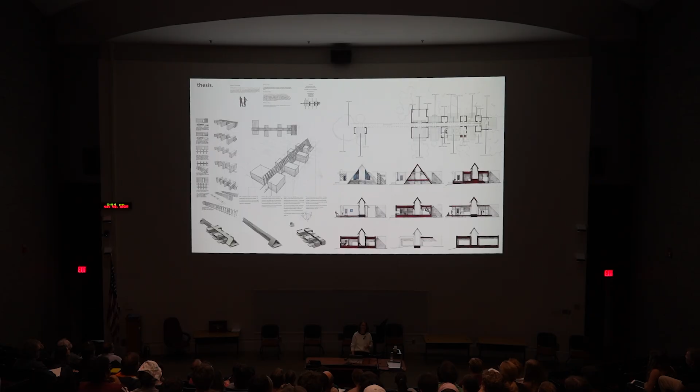After school, I went to work for a firm in Portland, Oregon. My first project, understandably, was a house. While working on it, the partner I was with brought in this book for me to reference, because it was 2007 and we still looked at architecture in books.

Inside that book was the Hill Country Jacal. For the first time, I saw my perspective reflected in architecture that was published work in the US. For me, it was a real moment of realizing that I could dream bigger than maybe I had about who I could be.

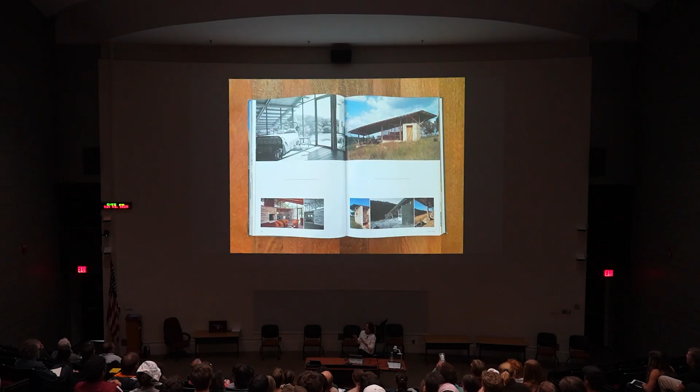Because this project was my introduction to Lake Flato, we're going to start here with your introduction to Lake Flato. This is the Hill Country Jacal, an early Lake Flato project. Jacal is a Mexican term for lean-to structures, like a shack.

Like its name implies, this is an off-the-grid weekend retreat. A thick limestone wall houses all of the messy stuff, like the outdoor shower, the composting toilet, the kitchen. Like a lot of the early Lake Flato houses, it's more porch than house. The screened living space and adjacent porch step down the hillside under a simple shed roof. It's oriented towards the prevailing summer breeze and faces a creek, while the stone wall shelters the living space from the northwestern winds.

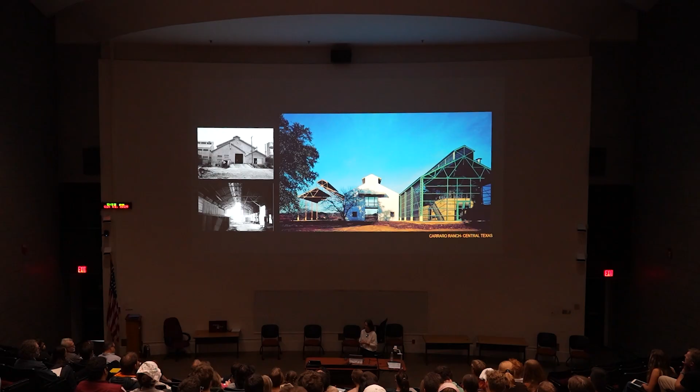Like most of the firm's early work, it's a ranch house, and these ranch houses get to follow a different set of rules than more traditional houses. Style takes a back seat, and instead it's shaped by place. These houses had to be climate responsive, so they're a collaboration with context — shaped by sun, wind, topography, and local materials. You see those threads through a lot of our early work, where we're always learning from vernacular and from the environment, leveraging the materials of place and creating buildings that are a collaboration with context.

Sustainability isn't a precious thing in these projects. It's a practical solution to meet the needs of the projects and the client.

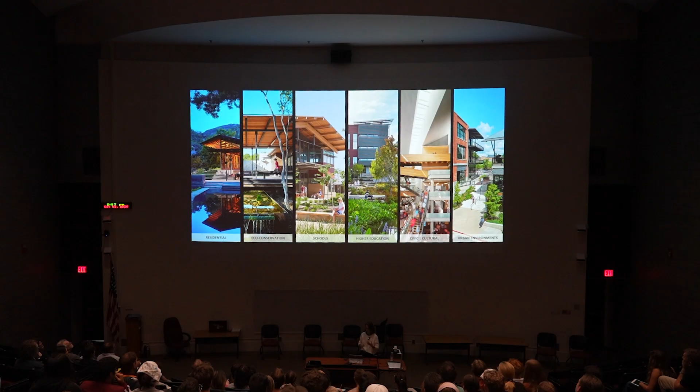From those early projects, our work's expanded to include a lot of different market sectors — residential still, but now also schools, civic and cultural, urban environments, and higher education, which has been my focus. And it's grown beyond those early Texas projects to projects all over the world. I got to work on a grocery store in the Cayman Islands, which is kind of ridiculous, but also incredible.

As our portfolio has grown, the office has grown, and you see that growth reflected every year in our Lake Flato photo when we all come together.

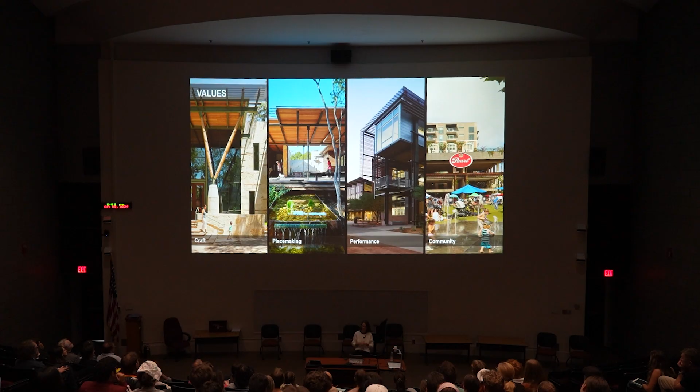All of these projects and all of those people are rooted in the shared values of craft, placemaking, performance, and community. Having these values clearly stated, and having everyone's alignment with those values, means there's some autonomy that lets us all innovate and bring value and meaning to each unique project. To be successful with each of these values takes deep collaboration with our clients, building users, our engineers and landscape architects, our contractors and consultants. And we lead those collaborations with curiosity and joy, making space to listen, because good ideas can come from anywhere.

These values and our commitment to integrative and collaborative design have proven results. We've received 13 Committee on the Environment Awards, more than any other firm. This is the project award that means the most to us as a firm because it acknowledges both great design and sustainability.

And we believe strongly you can't have one without the other. This quote represents to me why both matter: we don't love things because they're non-toxic or biodegradable, we love them because they move the head and the heart. Aesthetic attraction is not a superficial concern, it's an environmental imperative. And I'm sure most of us in this room believe good design can save the world at least a little bit, and I think this starts to represent why.

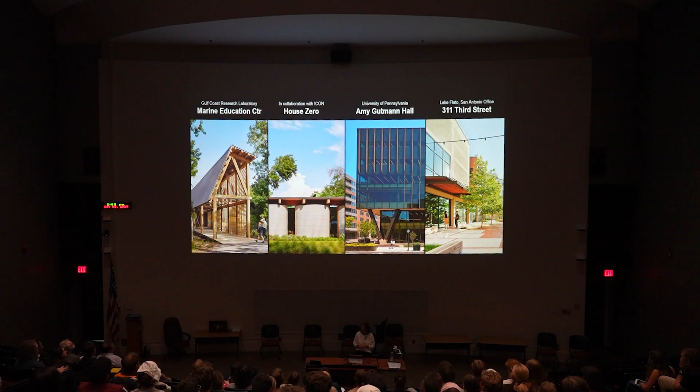So that was my introduction. With that, I'll walk through some of our newer projects. These range in scale, location, program type, and construction technology, but they're all united by those values of craft, placemaking, performance, and community. The first is the Marine Education Center in Mississippi, then a 3D printed house in Austin, Texas, and Amy Gutmann Hall, a mass timber building for the University of Pennsylvania—this one's my baby of the ones up here. And then if there's time, we'll talk about our renovation to our San Antonio office.

So starting with the Marine Education Center for the Gulf Coast Research Laboratory—I'm going to call this GCRL, because that's what we called it during the design phases, and it's a lot easier to say.

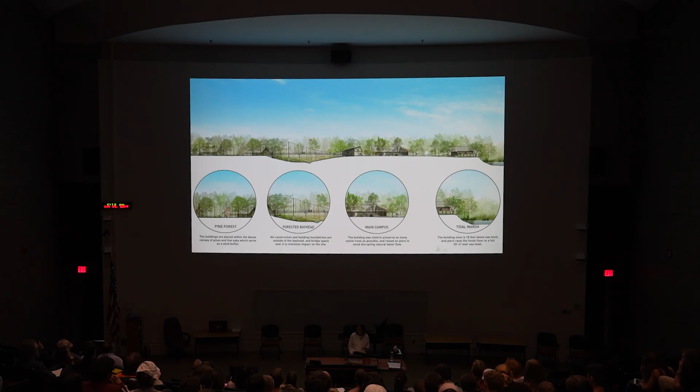The main campus, where the buildings are sited to preserve the native trees and are on piers to avoid disturbing the natural water flow. And then finally, the tidal marsh, where the buildings are elevated with a finished floor of more than 20 feet above sea level.

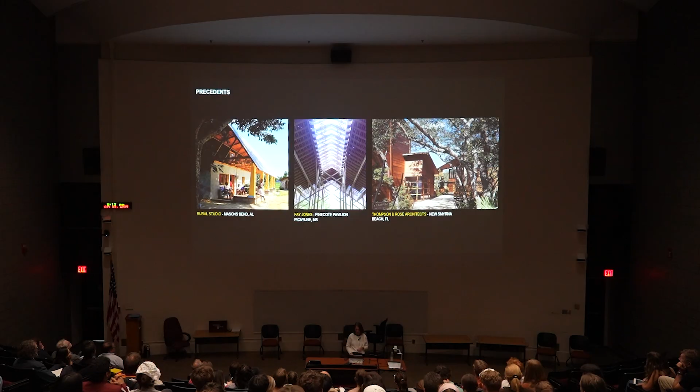While the team was learning about the site, they were also learning about the local vernacular. You can see all of these projects have really steep pitched roofs. It rains more than 65 inches a year here, so it dumps, and the roofs had to manage that. The team explored more modern interpretations of vernacular and learned from those and how they were aging, and those informed how they thought about the architecture.

This is where the entry sequence begins with this covered walkway. The building form is informed by the vertical pine forest, and like most of our projects, you move through the landscape before you enter a conditioned building.

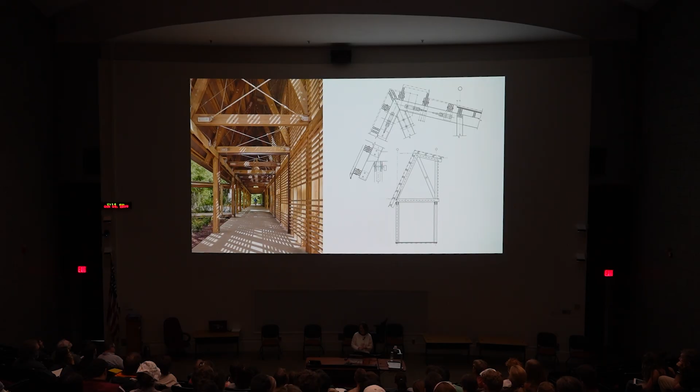There were a lot of lessons from Katrina for this client. One was that the structures needed to be repairable and that material needed to be readily available. So all of the structure is designed using dimensional lumber you can get from the hardware store, nothing bigger than a 2x12. It's also the southern yellow pine that's the same as the forest.

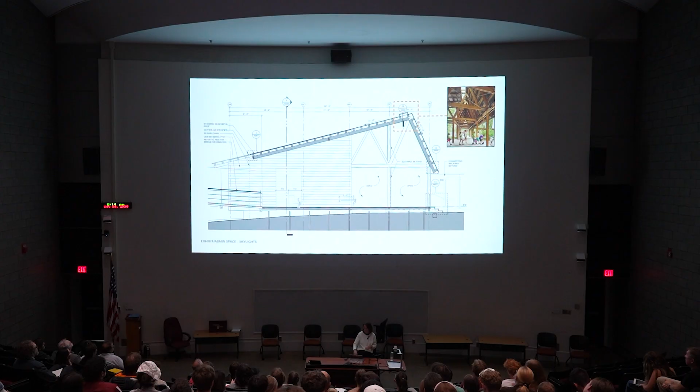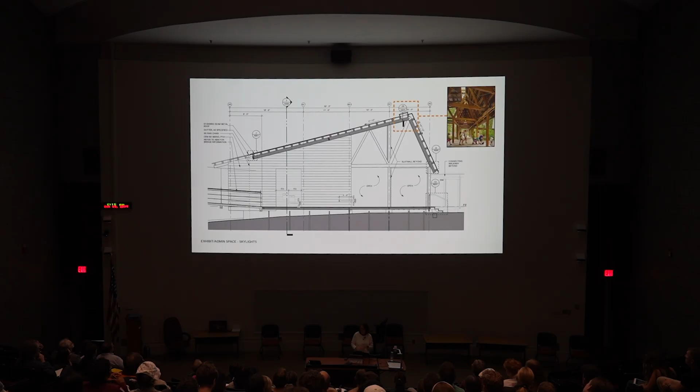Some of these outdoor roof spaces are pretty tall and could feel too dark. It was important to create moments to introduce light, to help these spaces feel more humane and balance the light levels, so skylights are introduced at their peaks. Another view of that learning courtyard, looking towards the suspension bridge that crosses the forested bayhead.

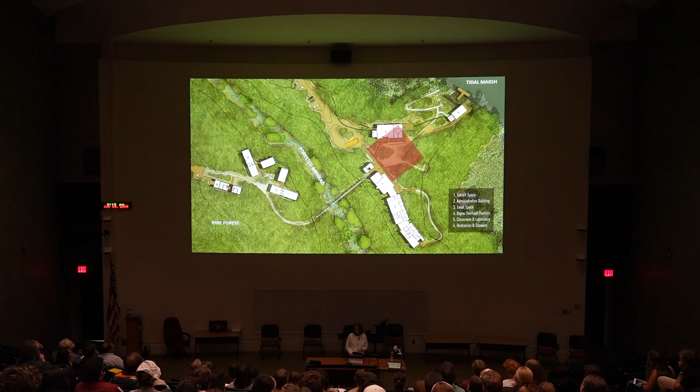On the site, exhibit space is the first space. Private office space is tucked further back, and then semi-public and semi-private spaces are more dispersed across the site. We looked at the entry, the exhibit space, and the learning courtyard. Now we're going to jump to the pedestrian bridge that spans the forested bayhead.

It's a 220 feet cable suspension bridge. The team sought out a bridge builder that works in remote areas, so they helicopter in all of the parts and use only hand tools to assemble the bridge, so there's no need for heavy machinery on this sensitive site.

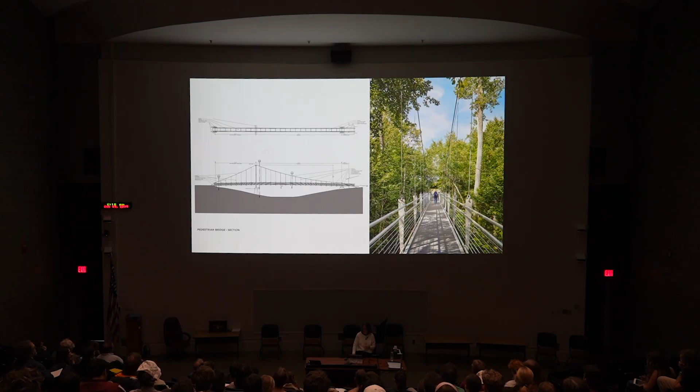The bridge connects the buildings and connects the land, and is a regular part of the experience of moving through the site and through a visitor's day.

And last, the classroom buildings. The West classrooms include spaces to teach outside. The screen porches are pointed in to help create a sense of community and curiosity.

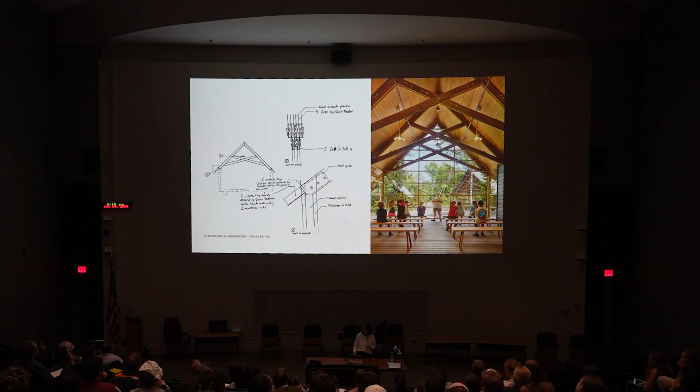Some of the working sketches the team used as they were working through how the trusses would work. Not every sketch has to be beautiful or precious; sometimes they just need to help you think through a problem.

How each of the buildings relates to the site and the different ecologies shape the building forms. The buildings on the main campus are elevated and placed on the ridge so the original water flow could be maintained, allowing water to flow into the forested bayhead and be cleansed before entering the tidal marsh.

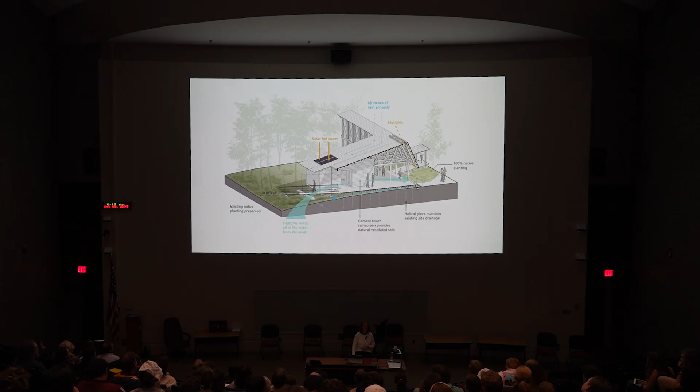The piers are set in from the slab edge to minimize the impact and gain a little extra space between them and any tree roots, in addition to allowing for that continuous water flow.

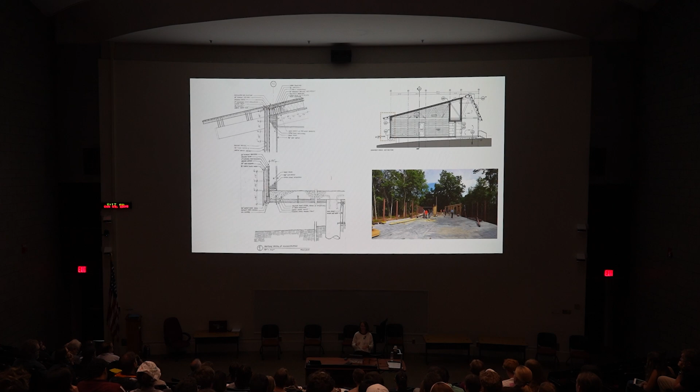The concrete slab provides weight to protect from uplift from hurricane winds, but it also had to be designed strong enough to support the weight of cranes and heavy machinery, because this was the only laydown yard the contractors got to work from. So preserving all of those trees on that site meant this was their work zone.

So from that, we're going to shift to our 3D printed concrete house. Lake Flato was engaged by Icon, a company developing 3D printed concrete technology. The CEO and founder is a showman, and he asked us to make the most beautiful house using 3D printed concrete, so he could use that to invite people to stay as he's showing them the technology.

This house is located in a residential neighborhood in Austin, Texas. The neighborhood's dominated by single-story bungalows, all pretty modest in size, so this little house feels right at home there.

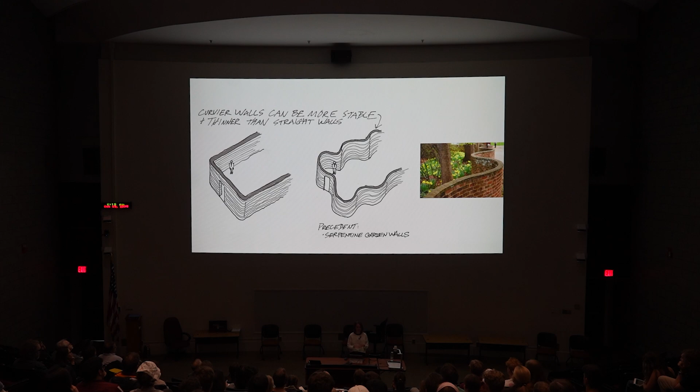This was a new material to us, so the team spent a lot of time with Icon learning about the material and how to work with it. One of our team members is a graduate from UVA, and if there's one lesson everyone from UVA leaves with, it's an understanding that curvy walls can be more stable than straight walls. And so they played with curves.

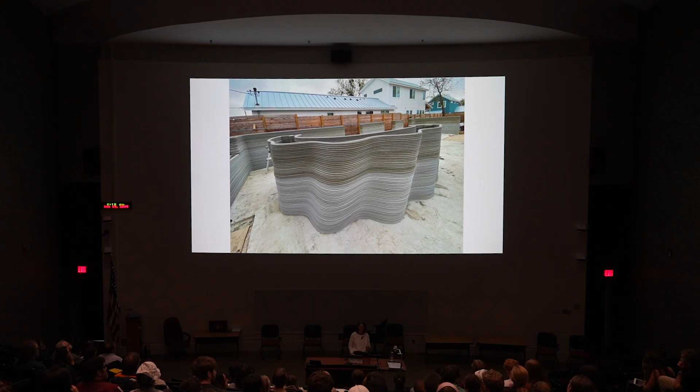3D printed concrete lends itself to functional and rational curves, and you can see those curves being realized in the plan. The team made the design decision not to print everything, to only print the elements that brought the most value from the concrete. So they printed the envelope, the exterior walls.

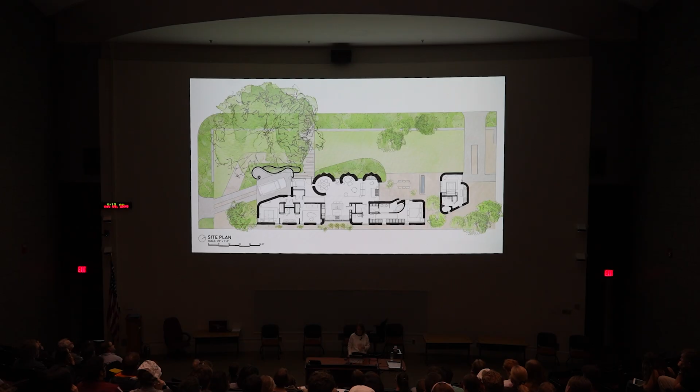They leverage the inherent material properties of that 3D printed concrete. It's durable and it weathers well. And then they used wood where it was most efficient, making up most of the interior walls. While the concrete's mostly used on the exterior, there are flourishes that bring that concrete into the interior and let it be celebrated. You see that most clearly in the 3 big barrels on the plan north.

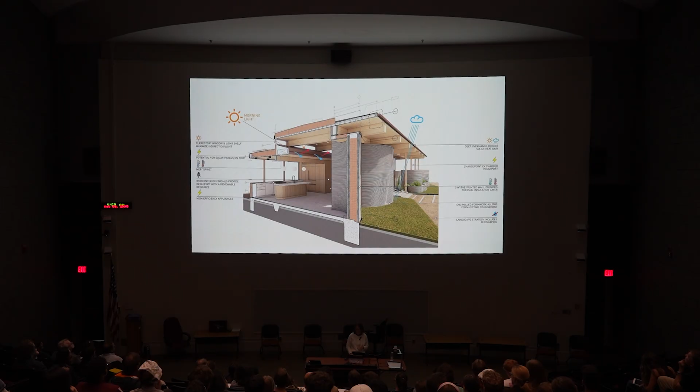A section through that house. With the concrete, we were able to create high-performance exterior walls, paired with other passive and active strategies. I think the MEP spine that you can see in the diagram was especially effective at solving the practical need of routing all of that mechanical and keeping it organized in an elegant, uncluttered way.

The printed concrete forms a cavity, and that receives the insulation. Windows form a break point between the interior and exterior walls, so we have a thermal break. No moisture or heat is coming through.

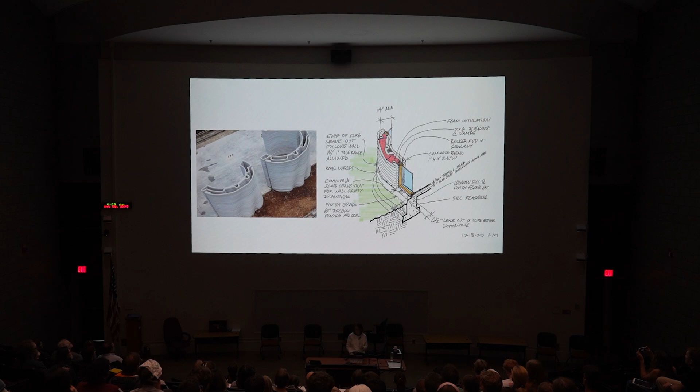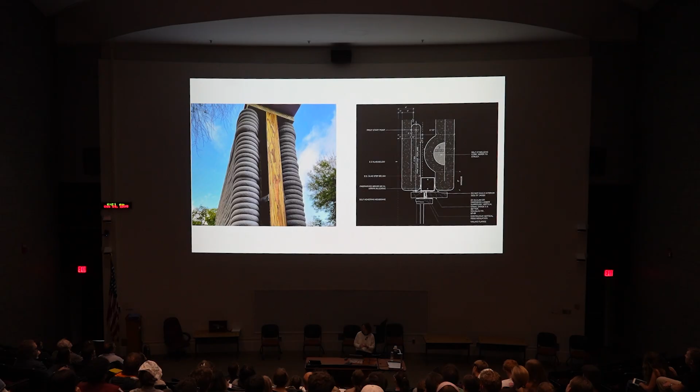This is what that detail looks like under construction, the jamb for the window, both in construction and as the construction detail. Windows are floor to roof, so we didn't have to try to create a header out of that 3D printed concrete. So we're not forcing the concrete to do something that it doesn't want to do.

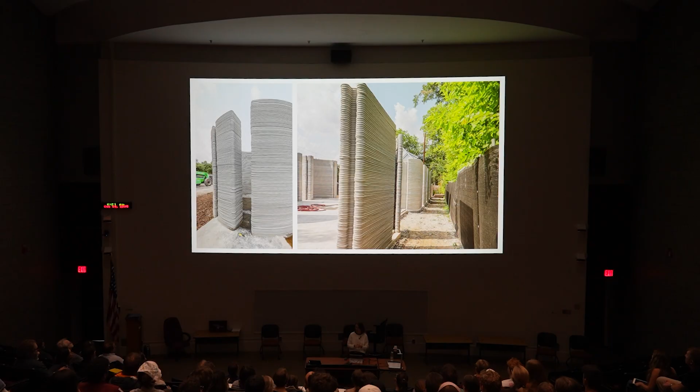And so I get to catch my breath and just share some pretty pictures. You've seen this one already, but I like it, so I'm sharing it again. Further down the facade to the patio.

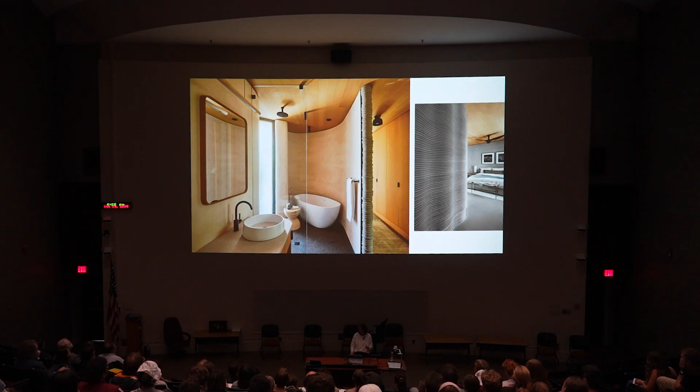The project tested different finish options. In the bathroom, a plaster finish got to be directly applied to the printed concrete walls, giving a more refined and finished way that still celebrates the curves of the concrete. Again, giving Icon the ability to showcase their material different ways. And one last shot of the interiors.

So from that, we're going to jump scales to our project at the University of Pennsylvania. Completely different scale, dramatically different context in West Philadelphia. This is a project for the School of Engineering and its new home for data science and AI.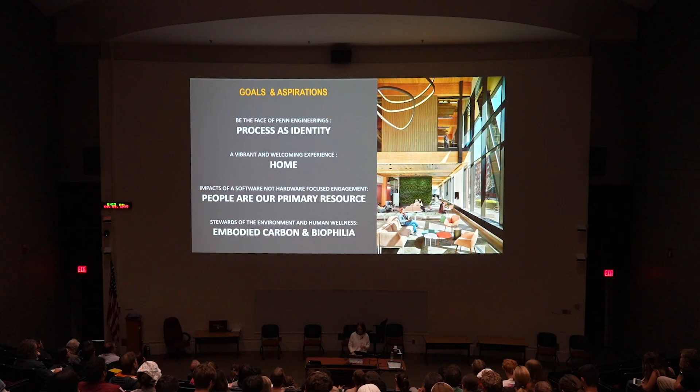Early goals for this project really shaped the design: that it use process as an identity, that it be a home for students outside of class, that it treat people as a primary resource, and that it address embodied carbon and biophilia.

The project site was a parking lot backed by a parking garage to the north, with housing all around to the east, south, and west. It's a really tight urban site.

To meet the building's programmatic needs, we needed to maximize the building footprint on the site. So the building is 6 stories with the long facade facing south. The lower 2 floors are instructional space and student collaboration space. The upper 4 floors are graduate research. And on the 3rd floor, a student commons connects those floors, becoming an anchoring student space in the building.

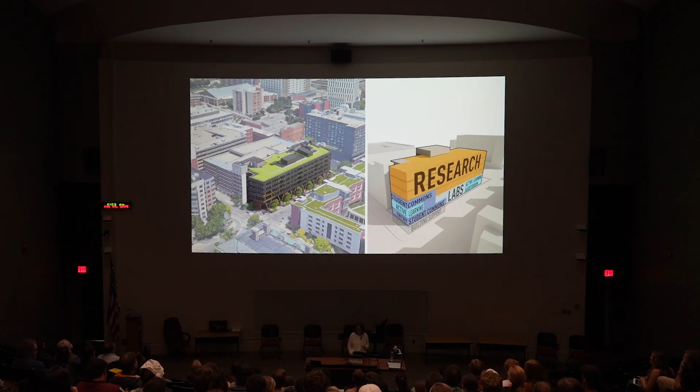You can see that programming reflected in the massing. It was important to the university and to us that the building engage the street and contribute to the urban fabric, but none of their programs could actually engage the street. So with no activating program, the landscape and architecture had to do that work.

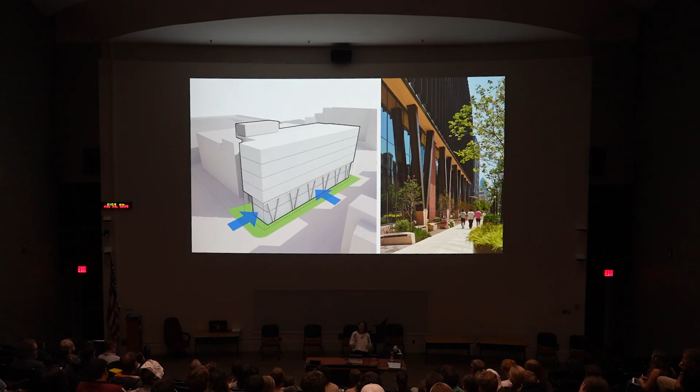The lower floors are pulled in to create space for landscaping at the building edge, and along the way hold space for pedestrians. Our landscape architect on this project was also a Virginia Tech graduate, Will Belcher. We only had about 18 feet for him to work with, and most of that was sidewalk, and he still designed the shit out of it, so he was amazing. And Will created an experience that is a joy to walk through and helps bring the exterior of the building to life.

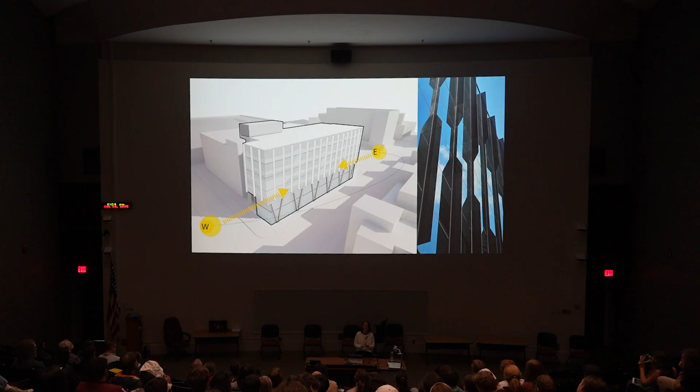On the upper 4 floors are the research centers. We used mullion fins to add scale, depth, and variation to an otherwise very long, flat facade. And these change dramatically throughout the day as the light changes.

On these upper floors, themes of biophilia and technology are extroverted on the building's facade in the form of a custom frit that also helps improve building performance by reducing solar heat gain. That frit also helps us disguise a lot of spandrel panels that we use to gain additional performance from the facade.

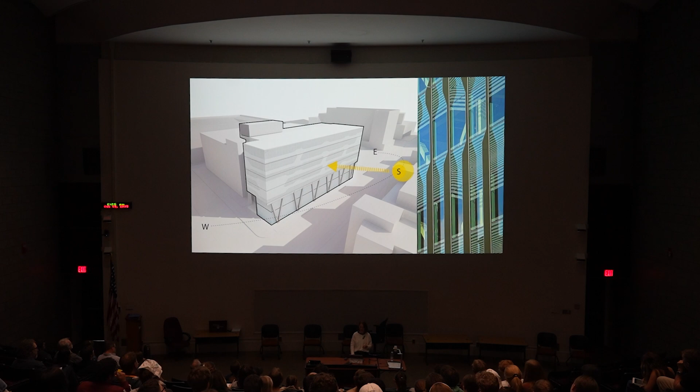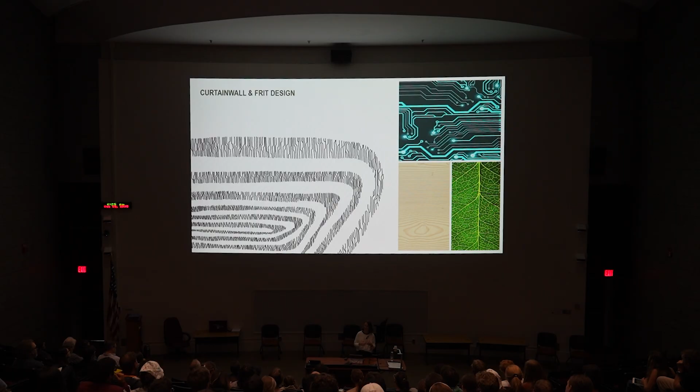The frit was developed in collaboration with an artist, Andrew Kudless, using computational design. It evokes natural analogs like wood grain and leaf veins, as well as digital patterns like circuit boards and network mapping. Andrew had used computational design to develop the frit, and that strategy resonated deeply with the School of Engineering.

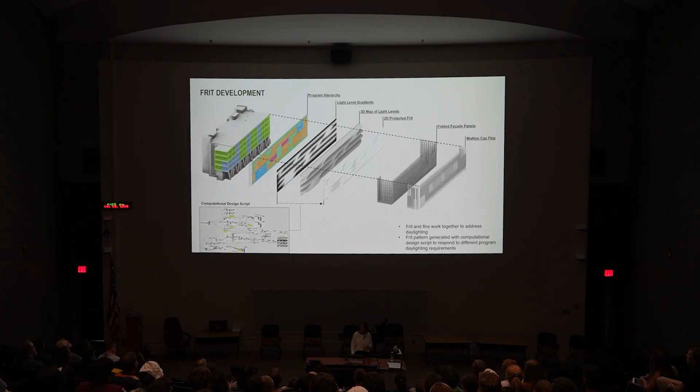I skipped too fast. Is it going to go back?

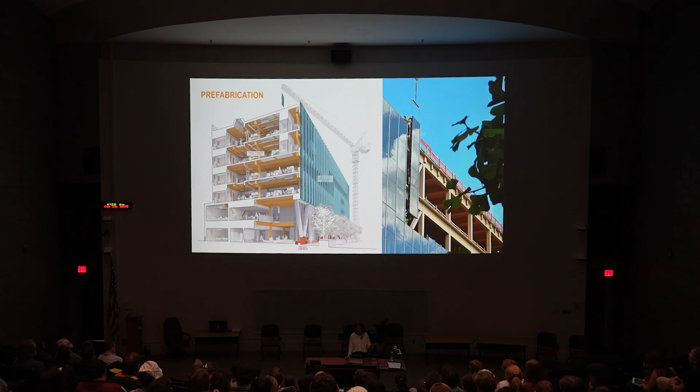Views of what that exterior looked like from the design rendering through construction, and then on to the finished, completed photo.

She's moodier in real life. I think that's good.

The lobby has visual connections to the street with ample access to natural daylight. It showcases the building structure, that mass timber. There's visibility into spaces that surround the lobby to create a sense of community and invite people to be curious.

When we talked to students, they wanted to be able to connect to the urban environment, but we were really worried about what this space might be like to work at at night when there was more visibility in. So we made this scale a little bit smaller, a little more intimate, and pushed that student commons up to the 3rd floor where they would be more comfortable collaborating at all hours.

Because our building plan is so tight and so efficient, to create relief and strengthen connections between the buildings, it opens up vertically as we move between floors. That's our purple areas. And those purple areas are paired with shared resources like coffee, resources that help magnetize those spaces and bring them together.

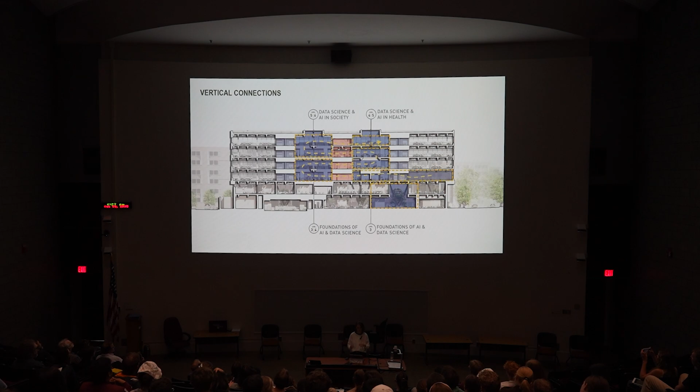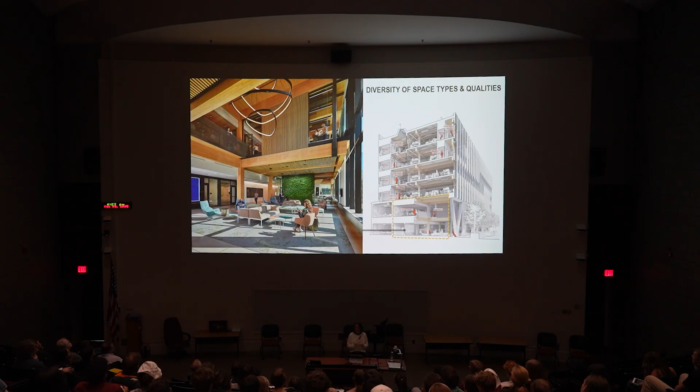Another view of that lobby, which is one of our first 2-story spaces. It's organized with things like the labs that do the fun stuff arranged around the space to help activate it. And then from the 2nd floor, you're always invited to see up or through or down or across. You're invited to move and explore.

On the upper floors, research labs share 2-story interlocking spaces. Those are populated with collaboration, again connected with food and drink to create a visual connection between floors. If anybody's doing deep research into code analysis, these are each 2-story spaces, so we avoid creating an atrium, which is probably a level of detail you don't want to know yet, but it saved a lot of money.

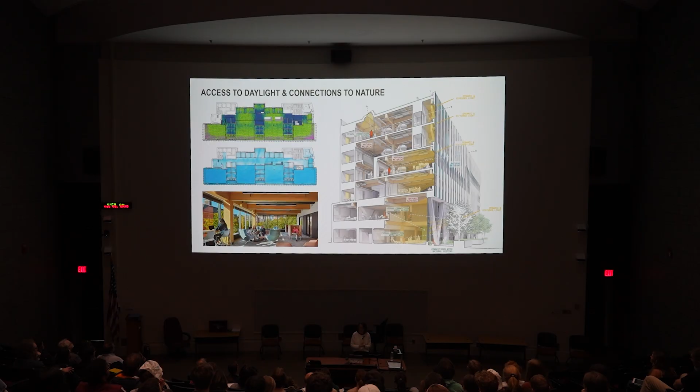In a building that prioritizes people, shared space should be the best space. So the project zoned the program within the building to leverage light and light quality. Spaces with potential for high glare are the more transient spaces on the building edge, while spaces deeper in the building with less access to light hold more of our AV-heavy meeting rooms. There is 100% access to daylight and views in the regularly occupied shared spaces on the upper floors.

This is that student commons on the 3rd floor. When we tour the project now, it's heavily populated by students that don't even have classes in the building, and some of them aren't even engineering students. When we ask them why, their answer is almost always the light.

Intuitively, most of us understand the biophilic role that using wood has in a building and on building occupants. Beyond intuition, the presence of wood has been studied to have meaningful and measurable impacts, like lower heart rate and increasing creative performance. In studies, even participants who expressed a dislike for wood saw a boost in perceptions of comfort and lower blood pressure. So you don't even have to like wood to get the physical benefits. That's one of our biophilic strategies.

The use of mass timber is one of our most significant biophilic strategies. It allows us to achieve biophilic goals in an innovative, integrated, and efficient way while also addressing carbon. The embodied carbon of Amy Gutmann Hall in timber is a 70% reduction compared to a baseline building of concrete and steel.

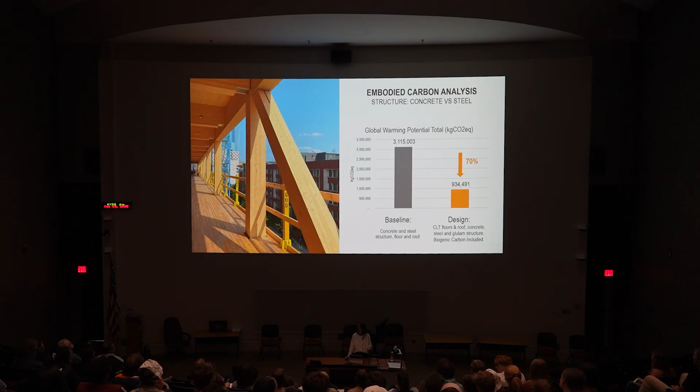When I went to school, we did not learn about embodied carbon. Does everybody know what embodied carbon is? No? So, operational carbon is the energy our buildings use when they're operating, like mechanical systems and lighting. Embodied carbon is all of the energy that gets used to build our buildings, in mining it and transporting it. As our buildings get more and more efficient, we can make more of an impact now with embodied carbon. I feel like that was a poor explanation, but it's a little bit of one.

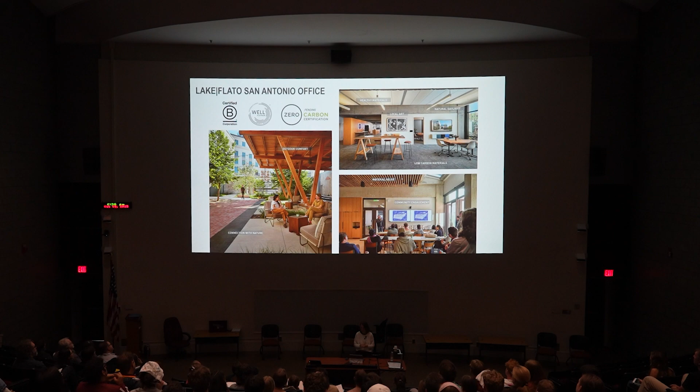And this was really our opportunity to embrace accountability. So along the way with the renovation, we've gotten our B Corp certification, we've gotten our WELL certification, and we're in the process of getting our net zero carbon certification.

So that's our office, and that's the end. Thank you, I think.